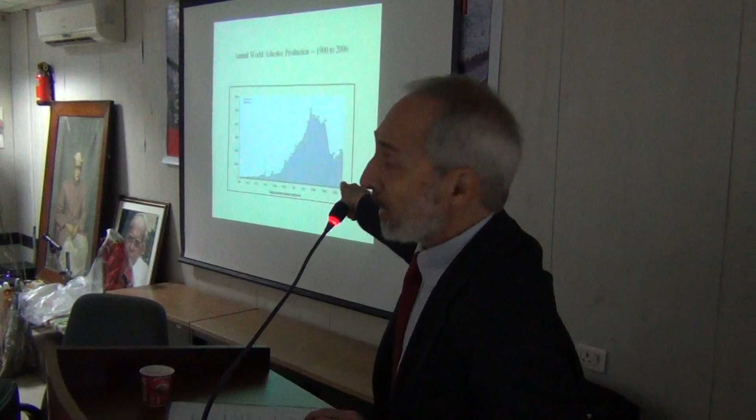This is the history of world asbestos use, starting 100 years ago. In recent years, consumption of asbestos in the world has not continued to decline. It declined a great deal in the 1990s, but after that it leveled off. The reason is that China and India are using a lot of asbestos, offsetting the reductions in other countries. There are over 50 countries which have banned asbestos in the world. And this is the problem.

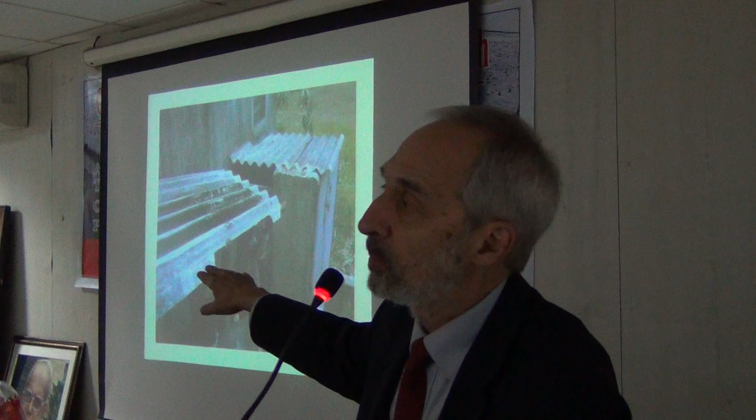This is just some more pictures of the familiar roofing we're talking about, the asbestos-containing product, which should not be used anymore in Bihar or any place else in India. You see that the product gets used even after its breakage for things like fencing, as shown here.

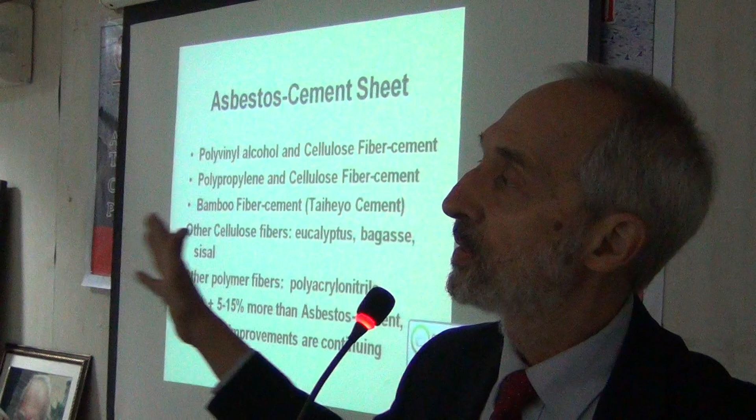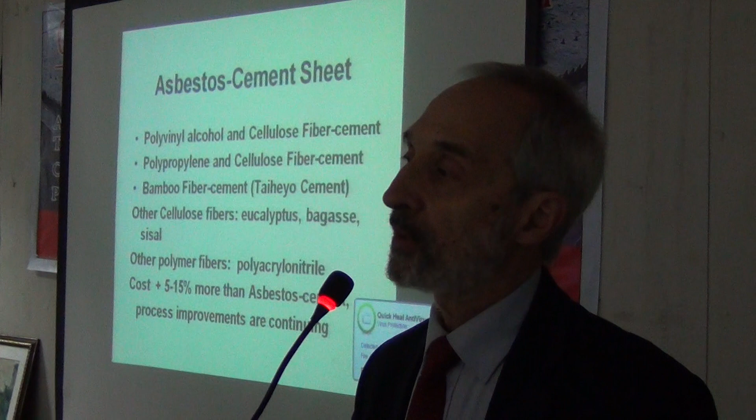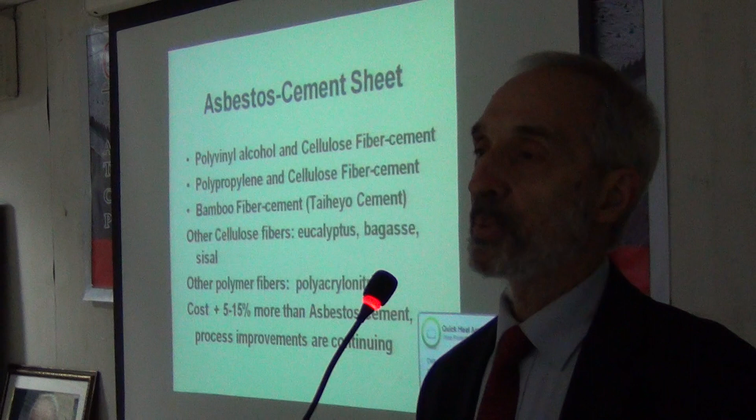Substitute materials should be used. There are two types of substitutes. There are substitutes where you replace the asbestos fibers with other types of fibers in making the fiber cement. There's a company called Everest here in India, in Coimbatore. They have a plant and are starting to manufacture fiber cement using plastic fibers, polymer, polypropylene fibers. This is a process that has been used and developed in Brazil for 10 years.

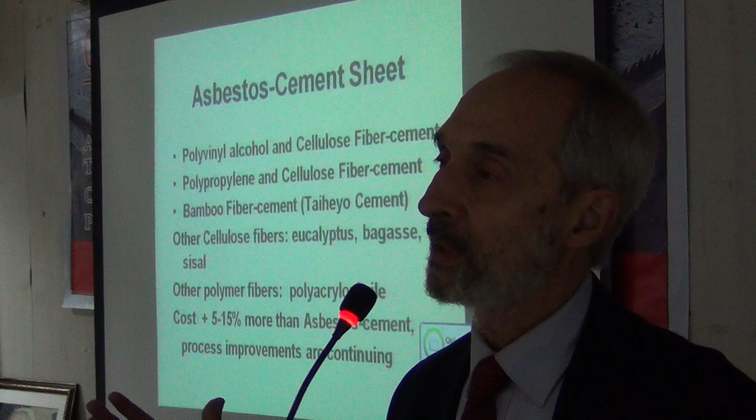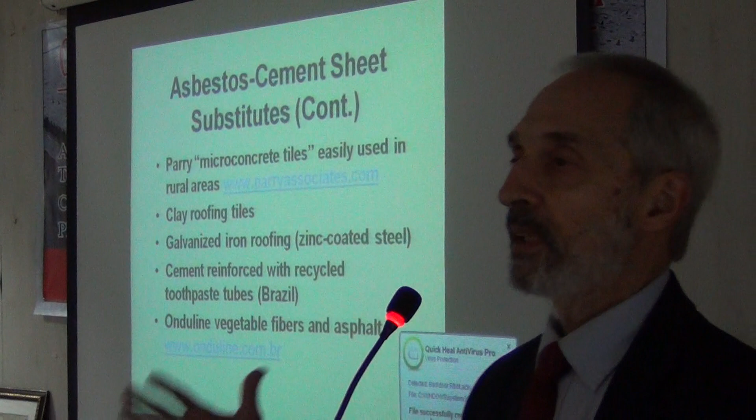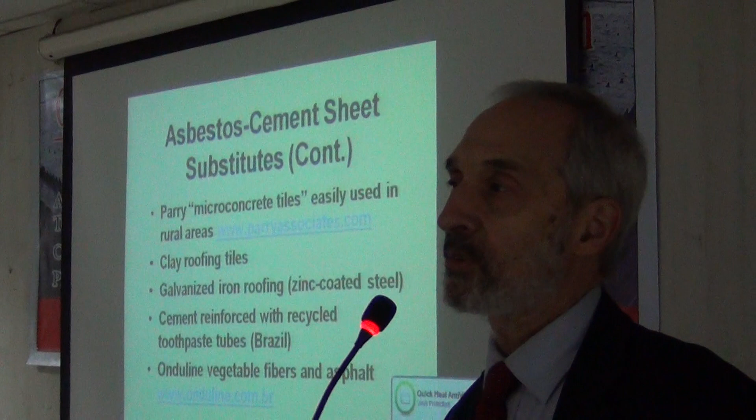So if you're going to be making fiber cement products in India, you should be using non-asbestos fiber cement products. The alternatives also include totally different materials — I'll talk a little more about the Parry tiles in a moment. These can be made with local materials like cement, sand, and gravel, and local labor, much more appropriate and comparable in cost to the asbestos products.

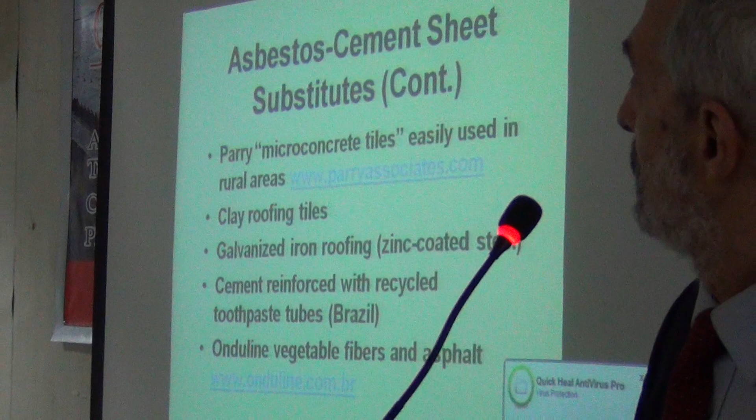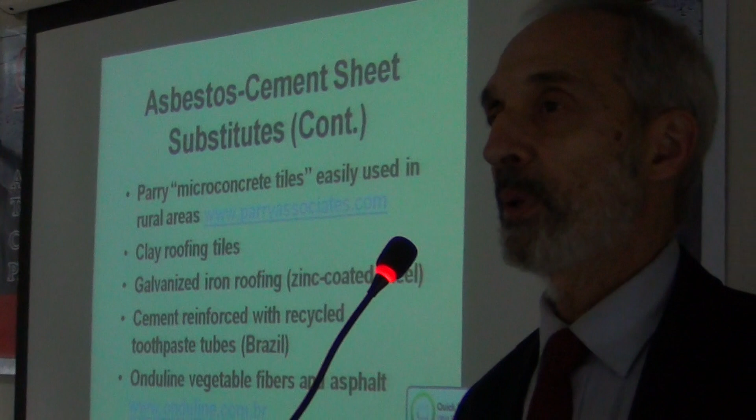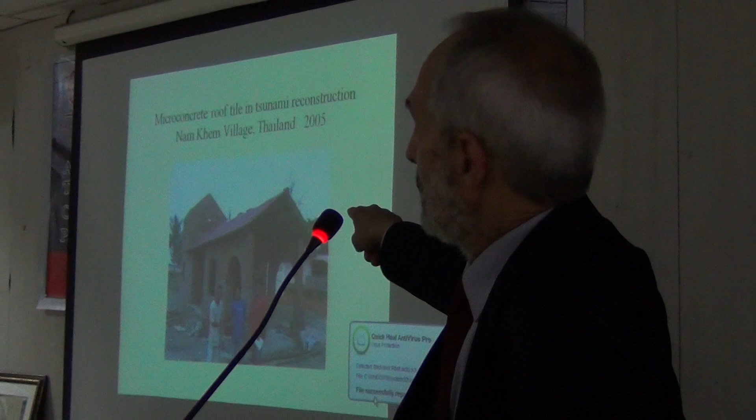There are also clay and various types of metal and plastic roofing materials which can be used instead of asbestos cement. So you can either replace the asbestos in fiber cement, or use a wholly different building material. These are the microconcrete roofs, the Parry tiles I was mentioning before.

As I say, these can be made with cement, sand and gravel, and made with local labor, local materials. This is in Thailand, this was tsunami relief reconstruction, the roof on these buildings.

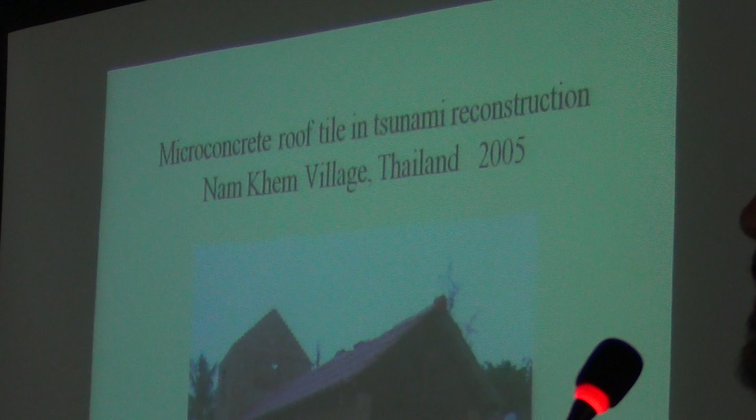This is the kind of thing that the government of India or the government of Bihar could encourage, could tell people this is what we would like people to be using instead of asbestos in schools, in public buildings, and private buildings. This kind of material has been used in countries all over the world.

You won't have to worry for the rest of the life of the building every time someone has to do repairs or renovations or demolition, that dust is going to be created and create a cancer hazard for the workers and for the people who live in the buildings. Use safer materials, the way to go.

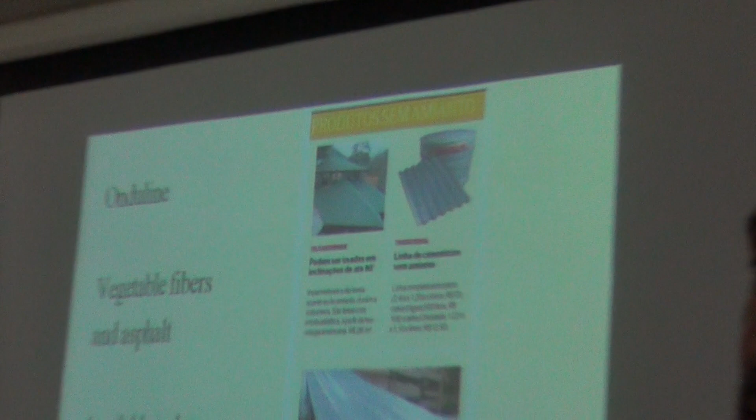These are just some examples of alternatives to asbestos. This is something that's being sold in Brazil.

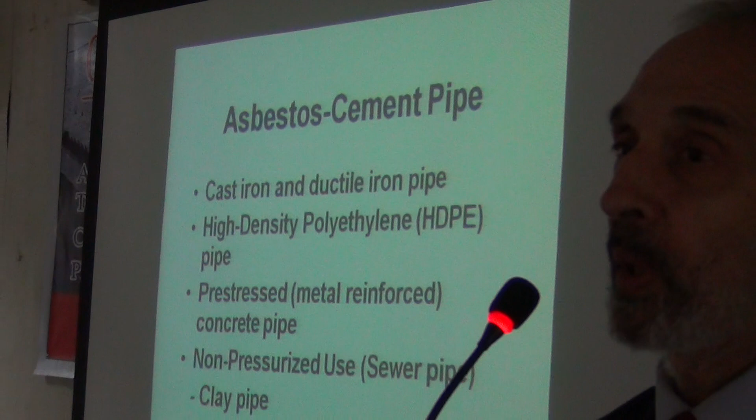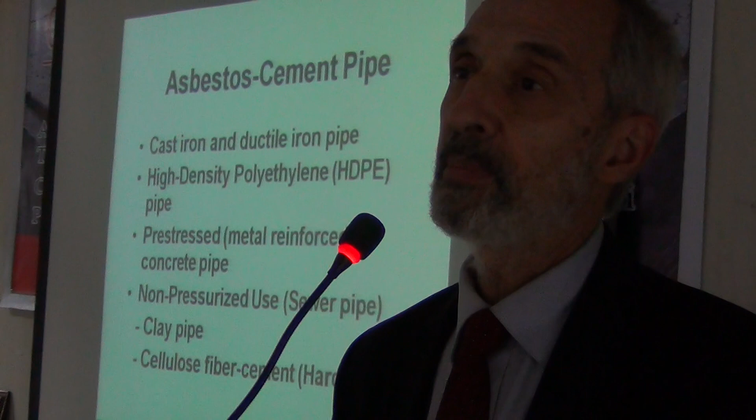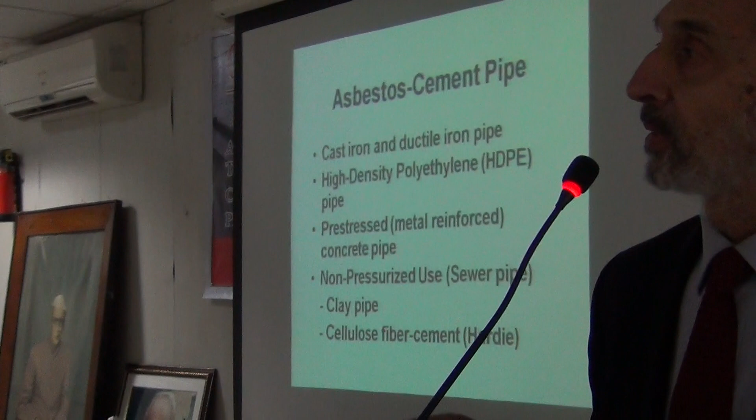With asbestos cement pipes, which have been widely used in water and wastewater systems in India, again alternatives are available. Basically we're talking about plastic pipes and metal pipes that can be used instead. And for wastewater and sewer lines, things like clay pipes can be used. So there are plenty of alternatives to asbestos cement.

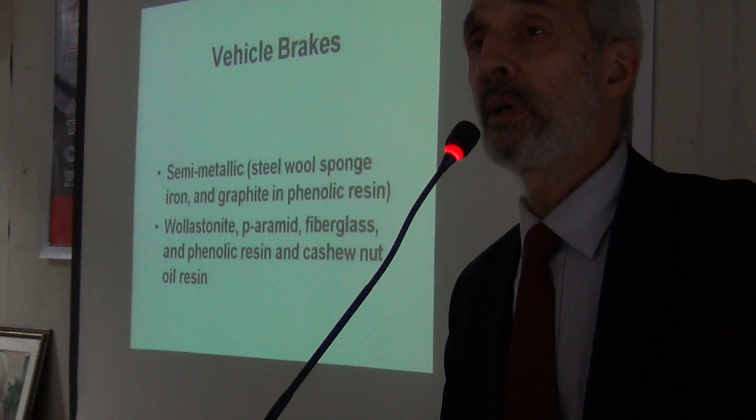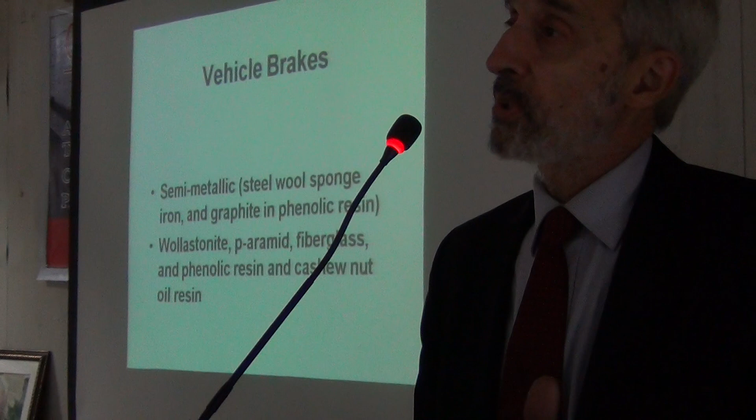Vehicle brakes have been replaced in all new cars, but in the replacement brakes for old cars, asbestos is still used in India, and this should be stopped. China, which is the major user of asbestos, actually imposed a ban on asbestos in vehicle brakes in 2003. So by way of comparison, this shows it can be done and has been done in other countries.

Water storage tanks have also been made with asbestos cement. There are plenty of alternatives, fiberglass and plastic made.

The World Bank has said that you shouldn't use asbestos in any new World Bank construction projects. And if you already have asbestos in buildings that need to be repaired and are being repaired under a World Bank project, they should be repaired under careful conditions with protection of the workers and bagging of the wastes and burying of the wastes so that there isn't any needless public or worker exposure to the dust from the asbestos in the buildings.

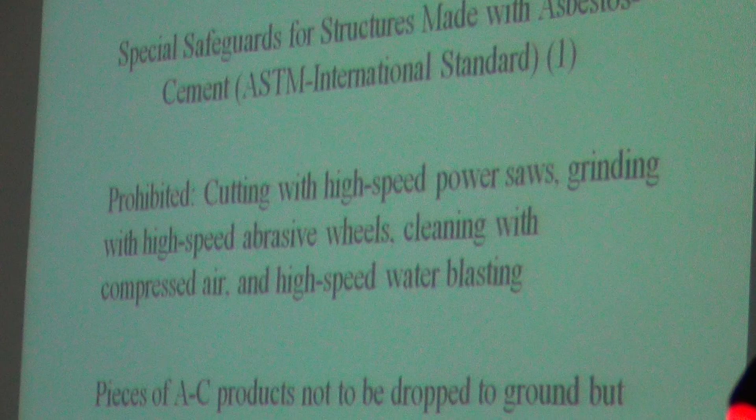There are lots of different safeguards detailed in the World Bank report. I won't go into these, but there are lots of problems. If you have a building with asbestos cement in it, it needs to be managed in a way to limit people's exposure to the dust. That's a continual problem every time there's damage and repairs and renovations made in the building. This is what you want to avoid by using non-asbestos materials in the first place.

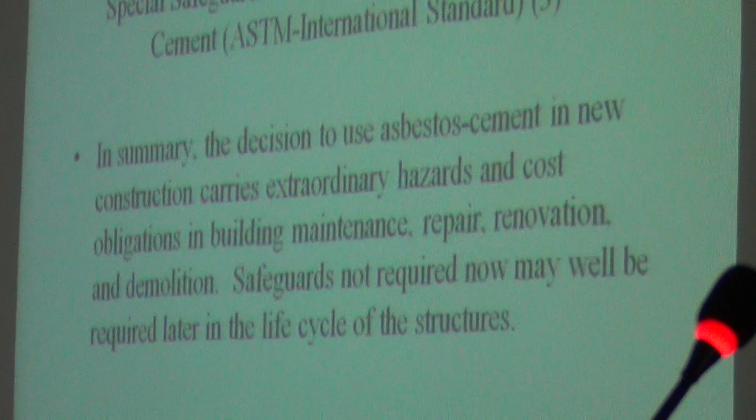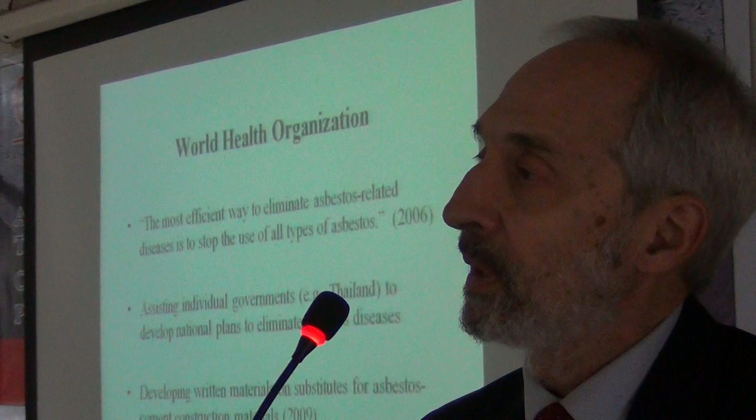The World Health Organization has also said all countries should ban asbestos, should not use asbestos products. The World Health Organization has been saying this since 2006. The World Health Organization estimates that 107,000 people die from asbestos-related disease every year in the world. And these are all preventable deaths.

The ILO, the International Labor Organization, has also said that all countries should ban asbestos. China may be moving toward doing that, and if that happens, that would leave India standing as the world's leading asbestos-using country when all the other countries have turned away from it. So you need to be thinking about starting to turn this around. You have a public health disaster in the making here.

The people in Muzaffarpur and in Vaishali have been confronting the asbestos industry and have been opposing the construction of new asbestos factories in their towns. I think that in just about every country, if people knew about the dangers of asbestos and the asbestos industry wanted to build a factory in their town, they would face these kinds of demonstrations anywhere in the world, at least where people are allowed to get out and protest about things like this public health tragedy.